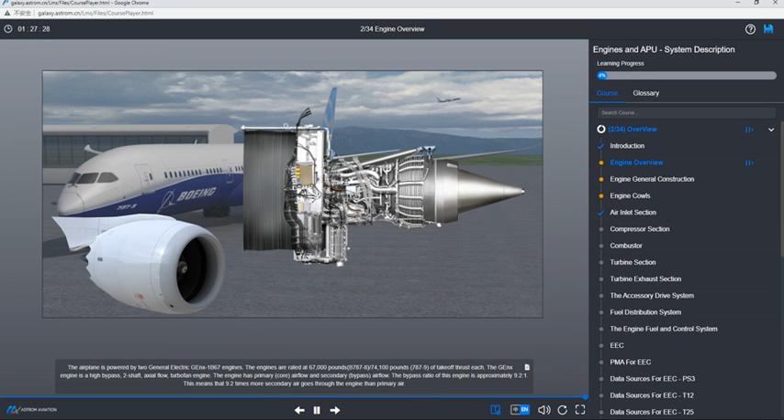For the 787, no external engine air bleeds are taken for aircraft systems, and as a result, this maintains high internal engine pressure ratios, which in turn improve the specific fuel consumption, the SFC.

The engine is a two-rotor axial flow turbofan engine of high compression and bypass ratio. The N1 rotor consists of a fan, a low-pressure compressor section, and low-pressure turbine section on a common shaft. The N2 rotor consists of a high-pressure compressor section and a high-pressure turbine section on a common shaft. The N1 and N2 rotors are mechanically independent.

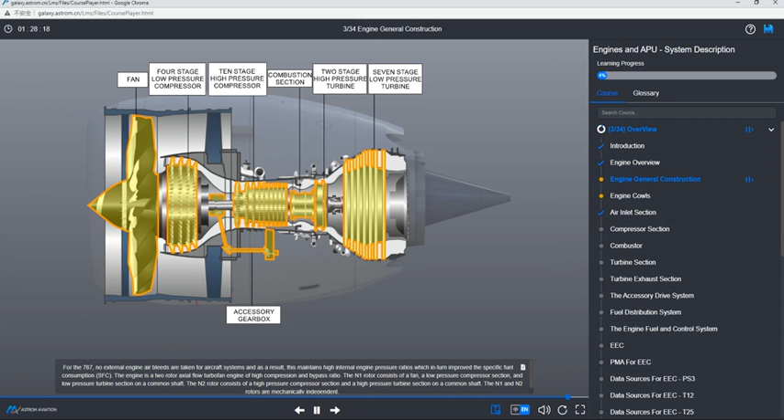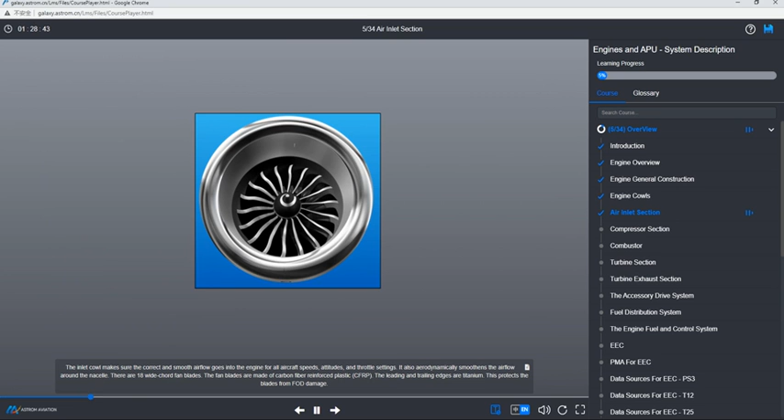The three cowls, or cowl pairs, provide a smooth aerodynamic airflow over, through, and around the engine: the inlet cowl, thrust reverser halves, and the exhaust cowl. The inlet cowl makes sure the correct and smooth airflow goes into the engine for all aircraft speeds, attitudes, and throttle settings. It also aerodynamically smoothens the airflow around the nacelle.

There are 18 wide-chord fan blades. The fan blades are made of carbon fiber reinforced plastic, CFRP. The leading and trailing edges are titanium. This protects the blades from FOD damage.

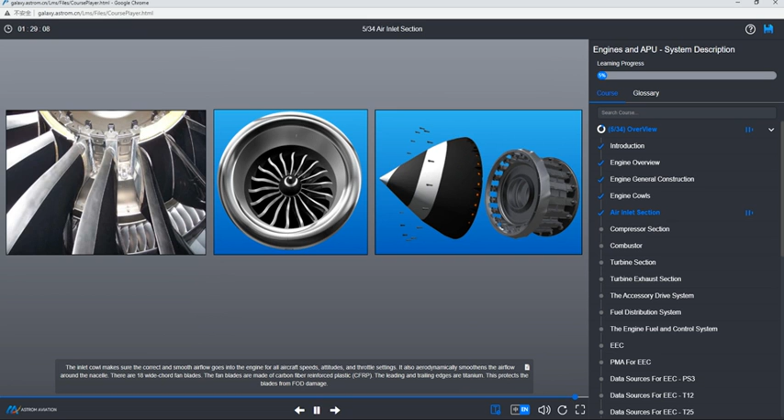The 787 engine compressor section has a single-stage fan, 4-stage booster low-pressure compressor, and 10-stage high-pressure compressor. For the 10-stage high-pressure compressor, stages 1, 2, and 5 are blisks. Stages 3, 4, and 6 through 10 are individually bladed spools. The inlet guide vanes and stages 1 through 4 have variable stator vanes, VSVs.

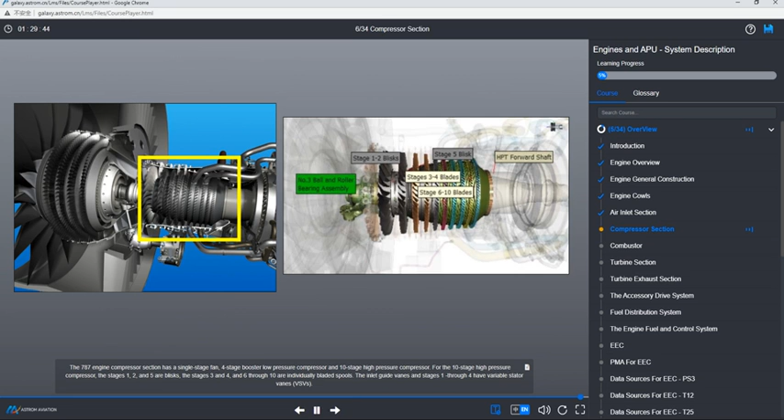The combustion chamber controls and mixes the compressed air and fuel for combustion. It is an annular-type combustor with inner and outer liners. It has a cooling airflow into and around the unit.

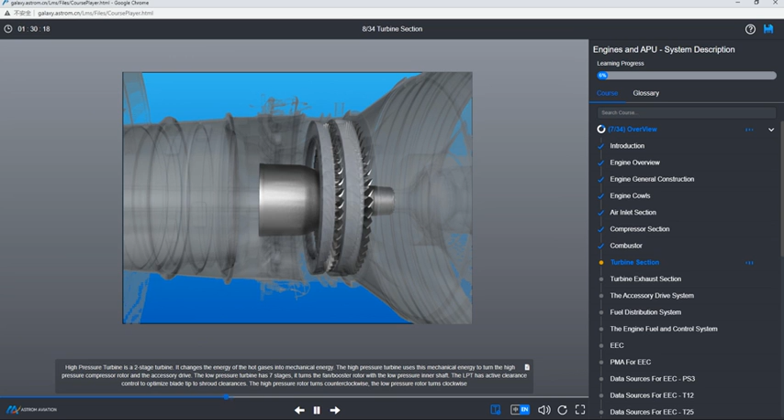The high-pressure turbine is a two-stage turbine. It changes the energy of the hot gases into mechanical energy. The high-pressure turbine uses this mechanical energy to turn the high-pressure compressor rotor and the accessory drive. The low-pressure turbine has 7 stages and turns the fan booster rotor with the low-pressure inner shaft.

The low-pressure turbine has active clearance control to optimize blade tip to shroud clearances. The high-pressure rotor turns counterclockwise. The low-pressure rotor turns clockwise.

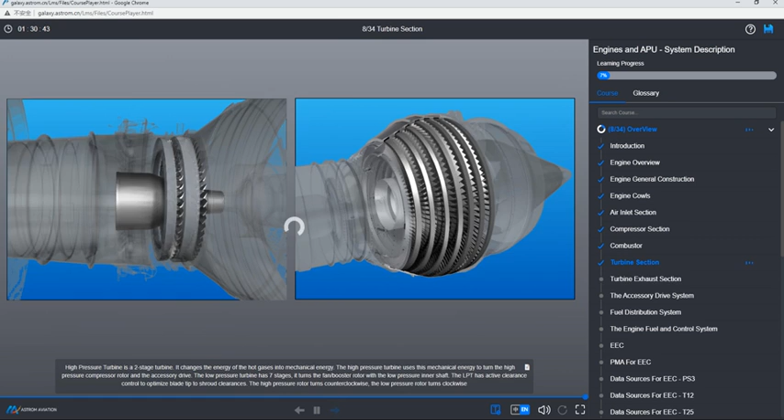The turbine exhaust system is an exit duct for the turbine exhaust gases. During usual engine operation with the thrust reverser stowed, the exhaust gas is contained and goes out through the exhaust components. The exhaust nozzle controls the airflow of the turbine exhaust as it leaves the combustor section. It also makes the outer contour of the exhaust gas.

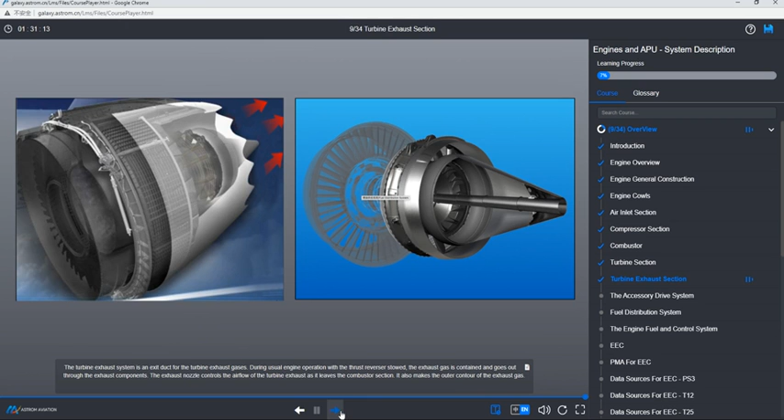The engine-driven accessories operate by a gear train attached to the engine core. The N2 shaft drives the gear train. The accessory drive system has the transfer gearbox and the accessory gearbox.

These accessory components are on the accessory gearbox: the variable frequency starter generators, engine-driven pump, main fuel pump, permanent magnet alternator, lube and scavenge pump, main fuel and oil heat exchanger, metering unit, main fuel filter, flow split valve, fuel adapter, and N2 speed sensor.

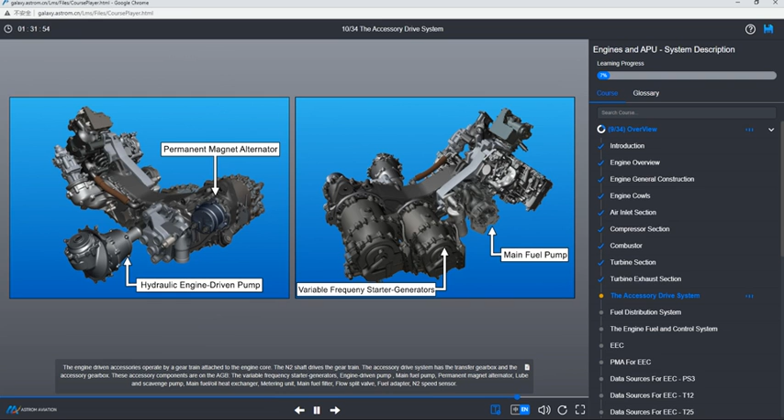The engine fuel feed system supplies fuel from the main and center fuel tanks. Fuel from the tanks goes through the main fuel supply hose to the engine main fuel pump, MFP. A centrifugal boost element in the pump pressurizes the fuel through the nozzles into the combustor chamber.

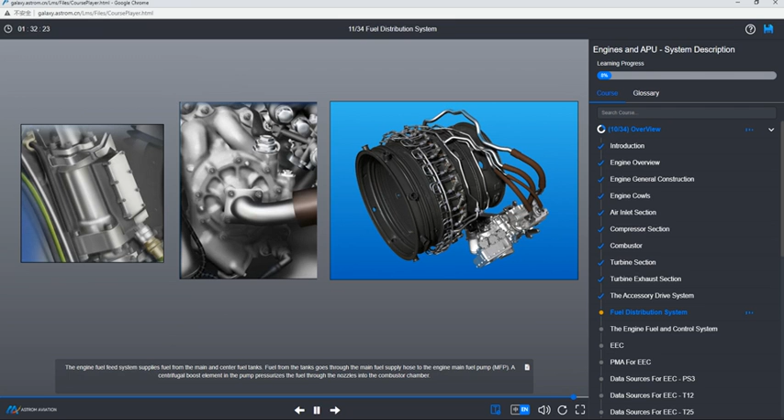The main function of the engine fuel and control system is to control the fuel to the combustion chambers in response to commanded power. The engine fuel and control system is a full authority digital electronic control system.

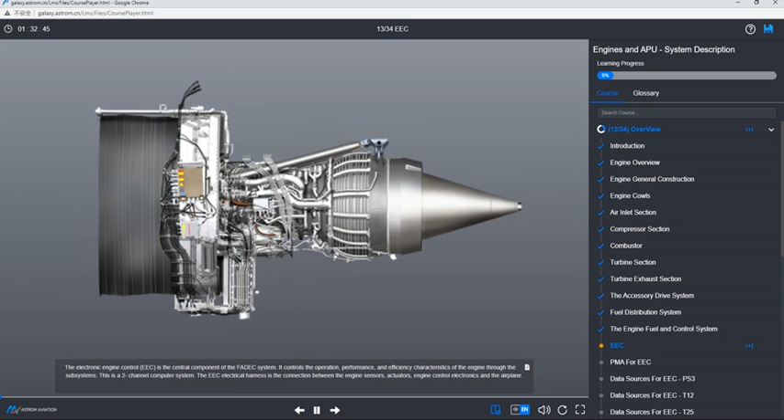The Electronic Engine Control, EEC, is the central component of the FADEC system. It controls the operation, performance, and efficiency characteristics of the engine through the subsystems. This is a two-channel computer system. The EEC electrical harness is the connection between the engine sensors, actuators, engine control electronics, and the airplane.

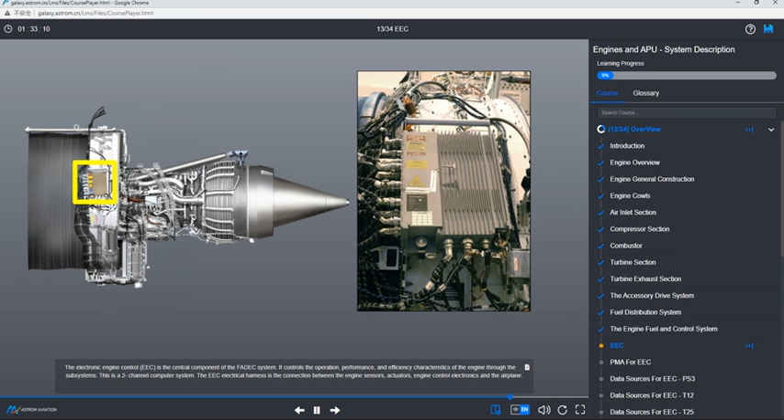The permanent magnet alternator, PMA, provides the primary source of electrical power for the EEC when the engine is running. The PS3 sensing supplies the static discharge pressure of the compressor air to the EEC for these engine control algorithms: maximum engine pressure, idle speed, lubrication system sump pressurizations, stall protection, combustor flame out margins, auto relight schedule, and engine anti-ice.

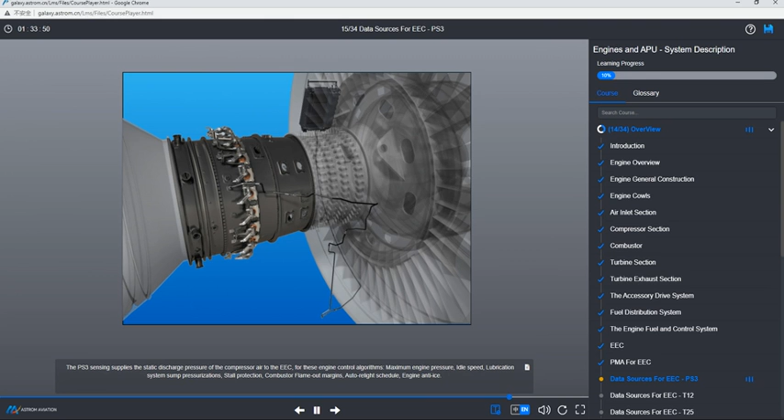The T12 sensor supplies the fan inlet air temperature data to the electronic engine control, the EEC. The EEC uses the T12 sensor as backup to the airplane total air temperature, TAT.

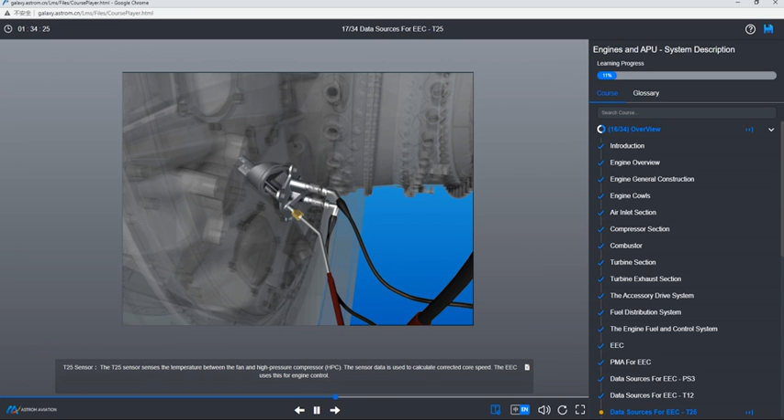The T25 sensor senses the temperature between the fan and high-pressure compressor, HPC. The sensor data is used to calculate the corrected core speed. The EEC uses this for engine control.

The T3 sensor senses the temperature of the high-pressure compressor discharge airflow. It is used for fuel scheduling and active clearance control.

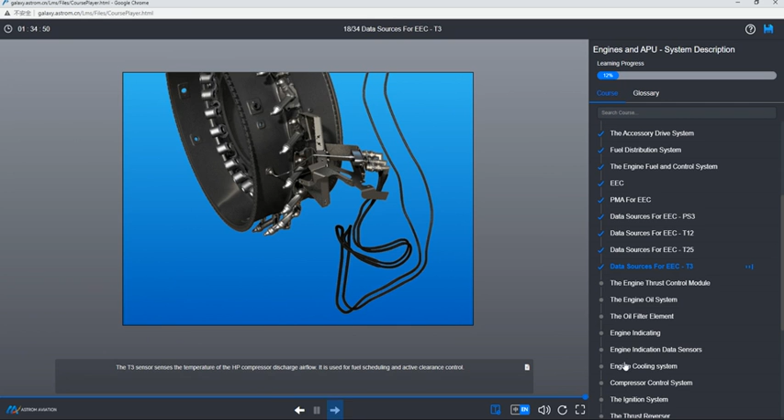The engine thrust control module is the control interface between the pilot and the engine. When the thrust lever moves, it turns the throttle lever angle resolver. The resolvers send thrust lever resolver angle data to the EECs and the Common Core System for thrust control.

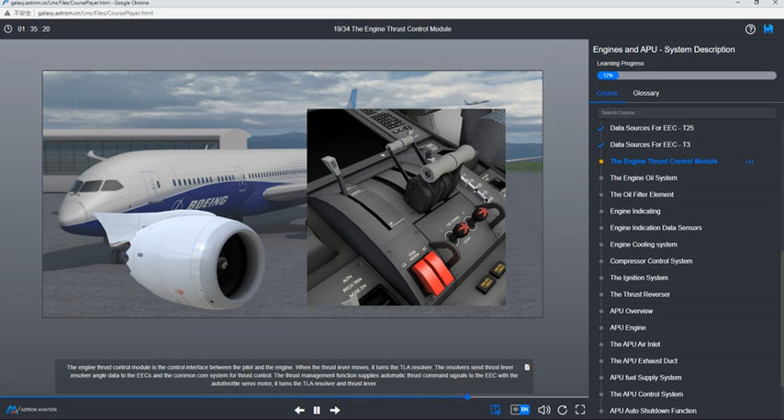The thrust management function supplies automatic thrust command signals to the EEC with the auto throttle servo motor. It turns the throttle lever angle resolver and thrust lever.